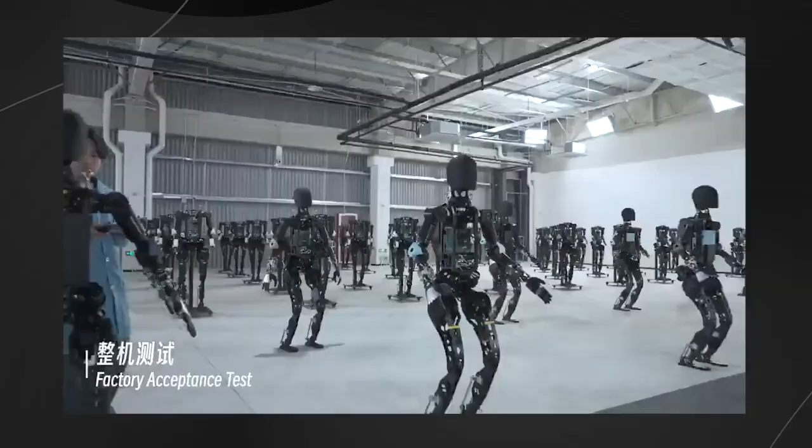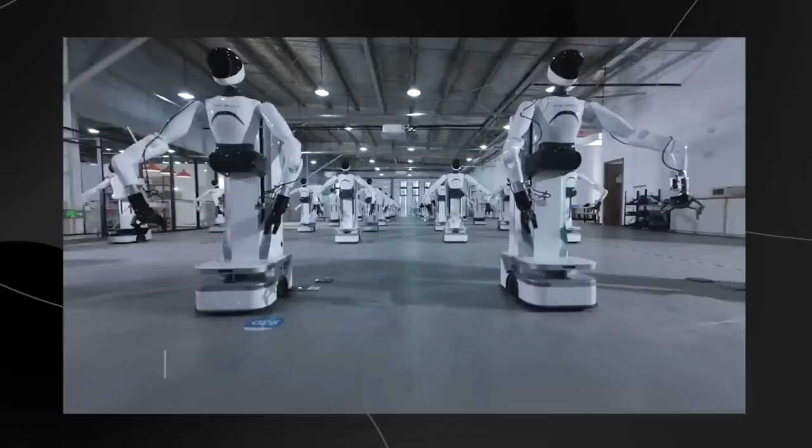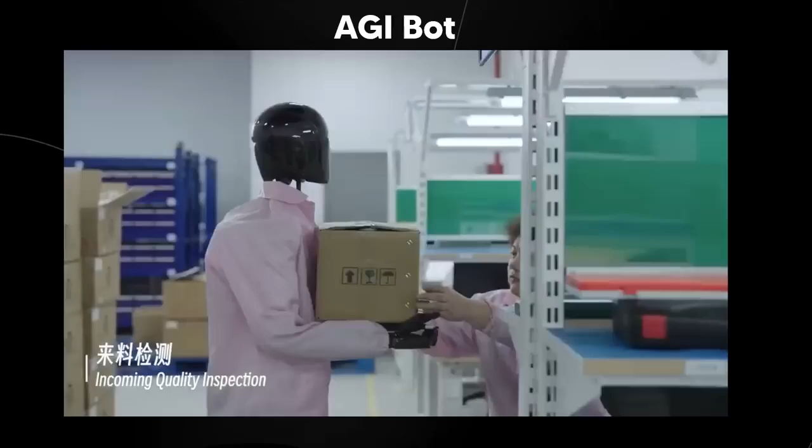China aims to mass produce humanoid robots by 2025. In this recent video from AGI Bot, a Shanghai-based robotics company specializing in the development and production of humanoid robots and delivery robots, we get to see firsthand how the world is actively changing behind the scenes. This company specializes in humanoid robots that will work in homes and factories around the world. Recently they've decided to hit the gas and ensure they're one of the leaders in this space, increasing production rates and scaling up.

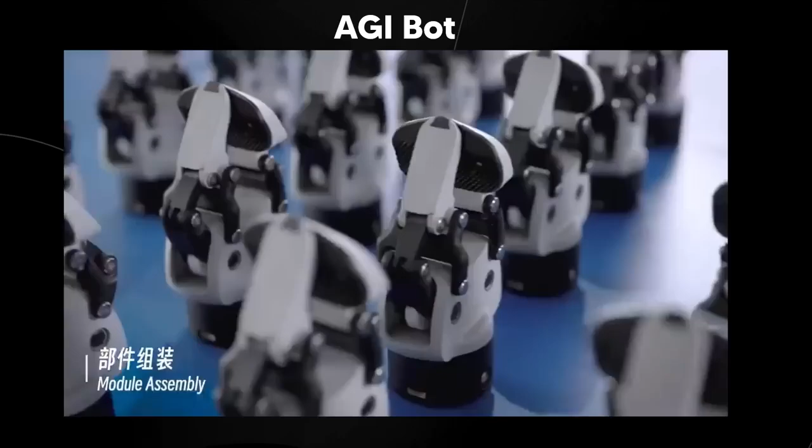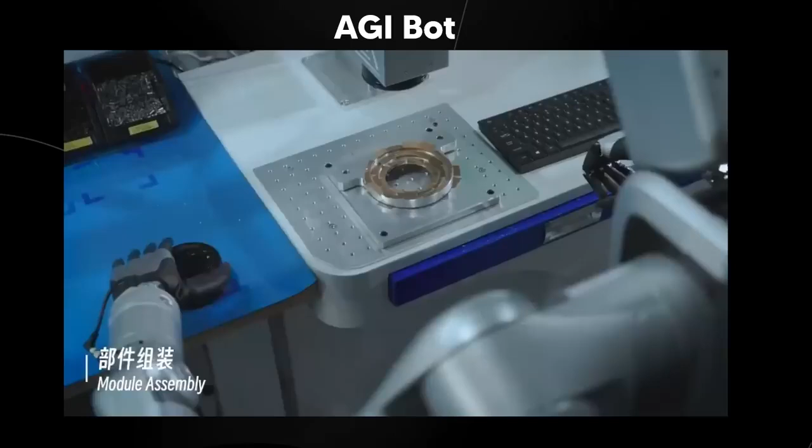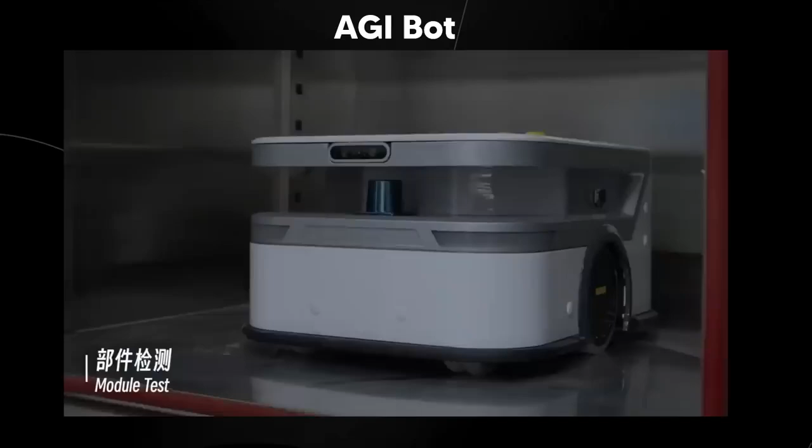In this demo, you can see them working on module assembly, ensuring the actuators are correct and all necessary components are working efficiently. They're going to produce so many robots that it will be incomprehensible the future we're going to be living in. Funnily enough, some robots in the factories are also assisting in this process, showing a symbiotic relationship that gets faster with every iteration cycle. After all, if you have more robots, you can get more done, and if you get more done, you can build more robots, and vice versa.

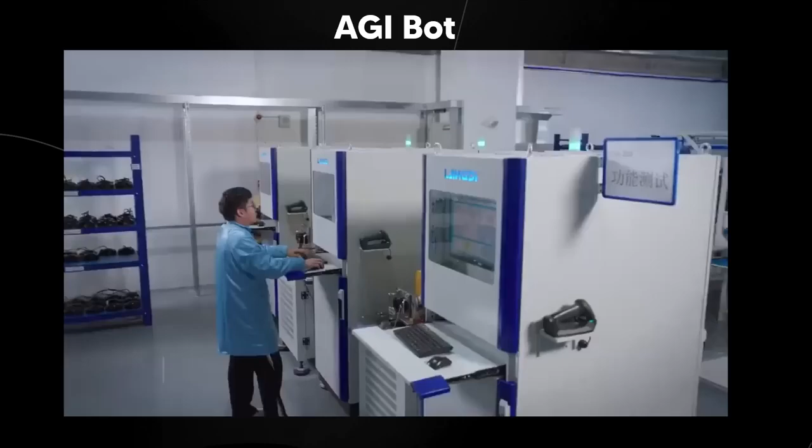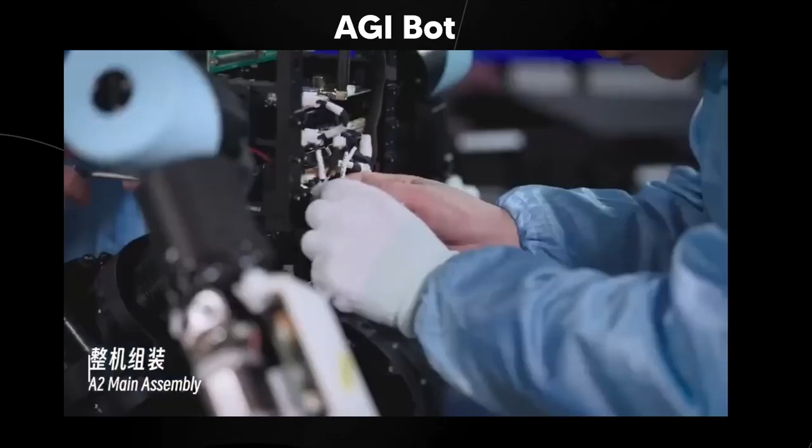They also have an extensive testing facility for these actuators, ensuring they can handle all necessary loads for many different environments. These robots are going to exist for quite some time, and they need to be tested in a variety of environments and stresses to ensure they're ready for the rugged, harsh terrain of the real world.

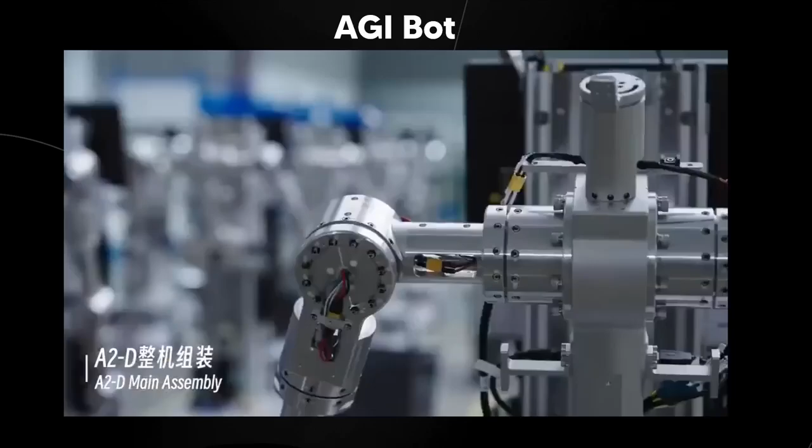Now, these robots aren't just humanoid robots. We can see here they have several different kinds. There's the A2D, and in the main assembly area we can see some have wheels at the bottom of their bases. This shows there are vast different applications for these kinds of robots, whether humanoids or wheeled ones, and different areas and applications that most people are going to be surprised by.

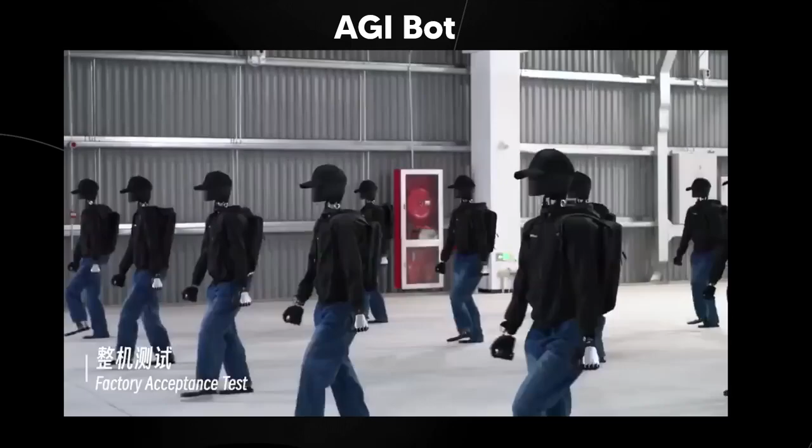At the last testing area, I'm not sure why they're dressed up, but it looks like a shot out of a Terminator movie. But no, this is a real demo from a real company that is really behind the scenes ramping up what is possible. We can also see at the Giga Data Factory just how many robots they have in production.

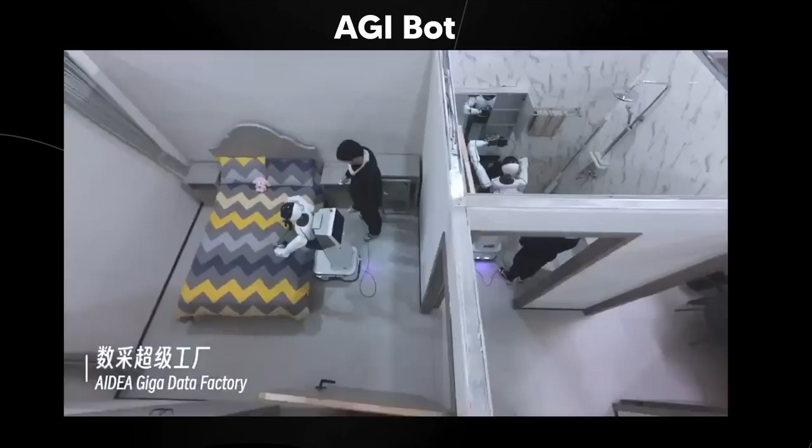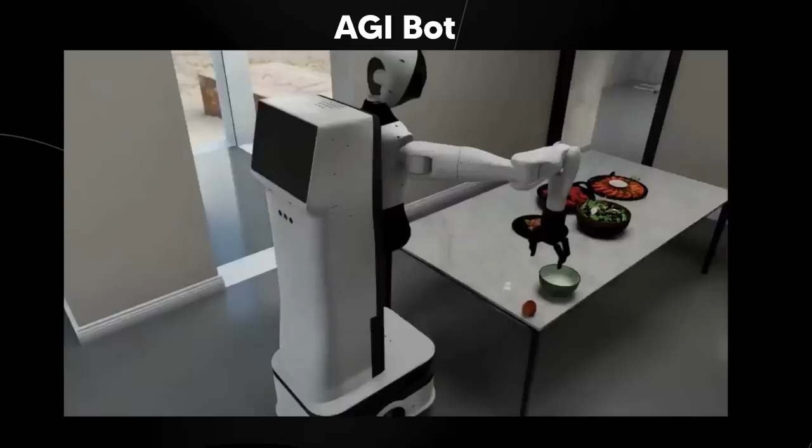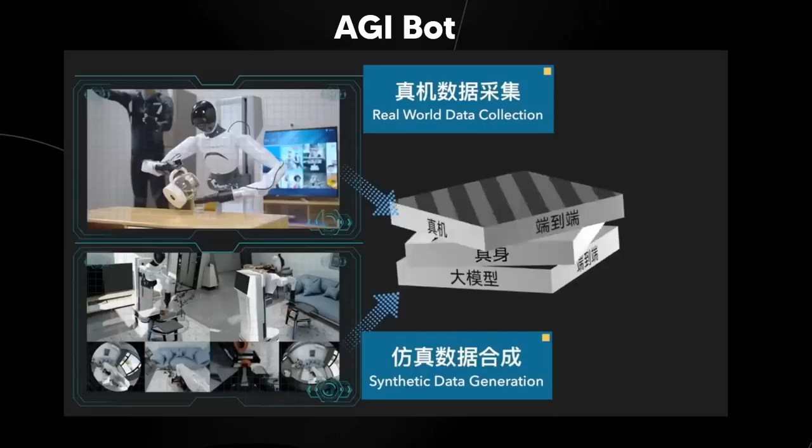One of the most incredible things they're doing with these robots is large scale data collection. They have small areas and environments where they're mimicking exactly where these robots will be deployed in your home. As you know, certain homes and environments differ in size and lighting, and all those individual factors have to be collected through vast amounts of data collection. This is how they're doing it: real world data collection and synthetic data generation.

With those two forces, they're able to generalize with these robots, have high precision, and with efficient fine-tuning, have a really effective stack that allows them to scale these robots to be the most effective at whatever task they do. Their AIDEA platform is going to be the one that allows them to scale this past the million mark. So it's going to be really interesting to see how these robots perform out there in the real world.

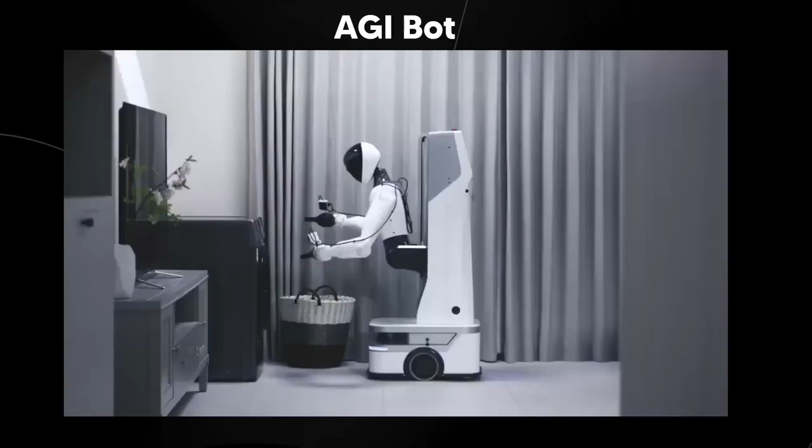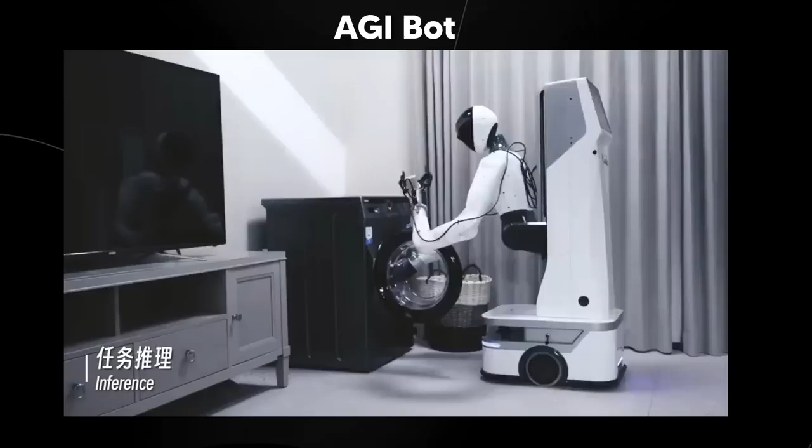But so far, based on what I'm seeing, a lot of the tasks these robots perform seem effortless and smooth. This comes as no surprise, as 2025 is the deadline for China's robotic efforts as they try to leap forward. I wouldn't be surprised if these robots, when commercialized, become quite as usual and normal as simply having a phone in your house.

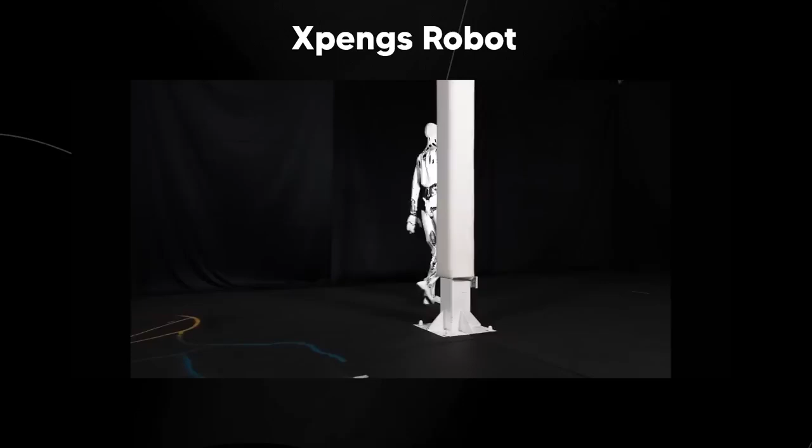This company isn't the only one doing this. We know other companies around China are also working on humanoid robots. The demo you're seeing here is XPeng's robot, a subsidiary of the Chinese electric vehicle company XPeng, focusing on developing intelligent bionics. This company was founded in 2016 and is headquartered in Shenzhen, China.

The craziest thing about this demo was when I showed it to my audience, they were really surprised this was even real. Many claimed it was CGI, but after seeing several demos of this robot in a variety of videos, it just goes to show how far we are in terms of the timeline to where these robots are performing things humans can't even fathom is actually real.

For those thinking this is just a short demo of it walking around in a pristine environment, the company showed us exactly how this robot will be applied to various industries. One key demo was this robot actually working inside a factory, doing several different tasks, and it seemed very human-like in its ability to grab certain objects, analyze objects, and efficiently work with the team.

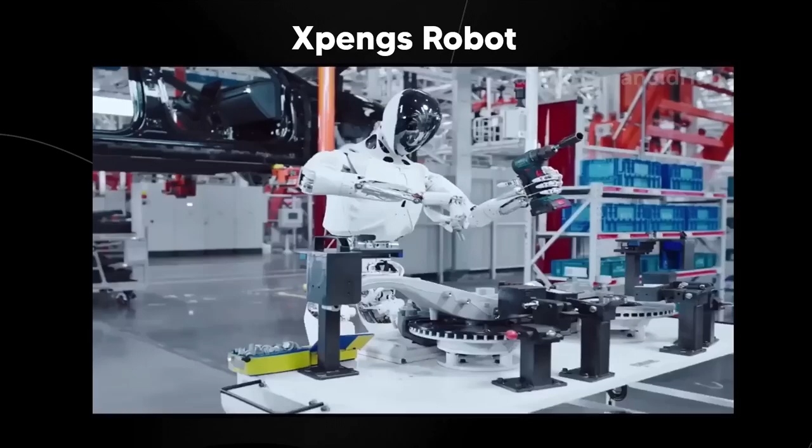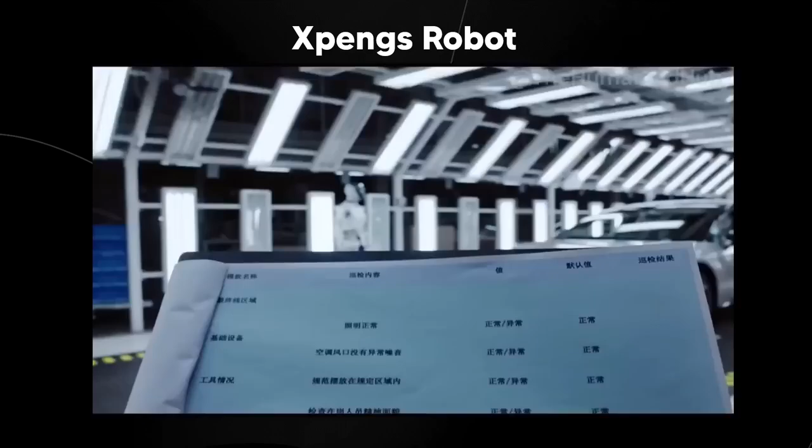This is surprising a lot of people, because right now we walk around and don't see humanoid robots walking amongst us. But behind the scenes in these factories in China, there is a quiet revolution brewing. Humanoid robots are going to be the next big thing in terms of market efficiency for those trying to scale any kind of physical labor-intensive company. We're seeing firsthand that these companies are really advancing in terms of pace and development.

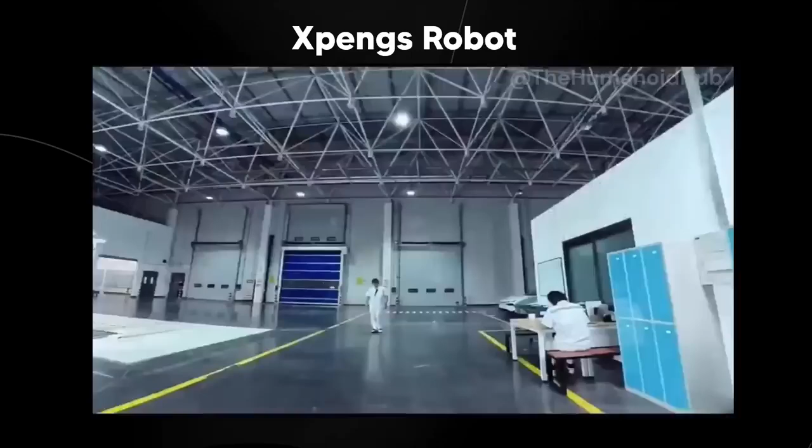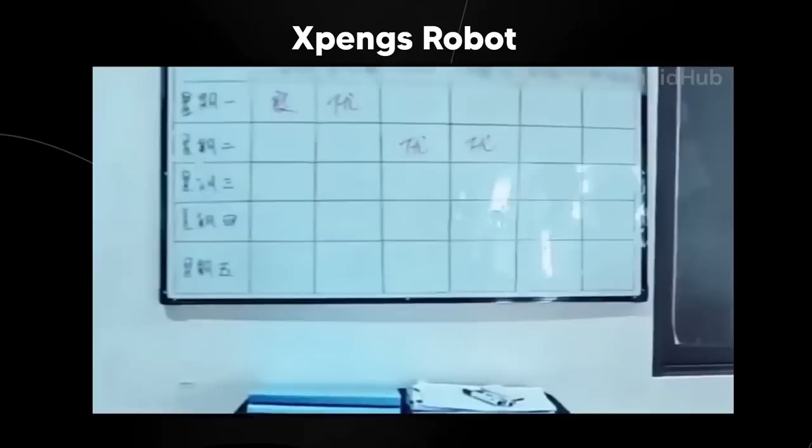Car manufacturers are one of the biggest users of these humanoid robots. I wouldn't be surprised if by the year 2030 we see fully automated car factories run by a team of humanoid robots, with maybe one or two orchestrators operating and automating them for efficiency. Overall, you can see the vision system performing really well, getting the robot to perform certain tasks.

I think this is one of those moments where you have to see, okay, we are now entering that futuristic timeline where humanoid robots are going to be a part of the future and a key part of the economy in terms of keeping up that economic growth.

This company has actually raised over 7 billion yuan in funding and gained the recent backing of industry giants like BYD and Huawei. This support coming from some of the biggest names in the industry is a clear sign that the world is starting to take humanoid robots seriously.

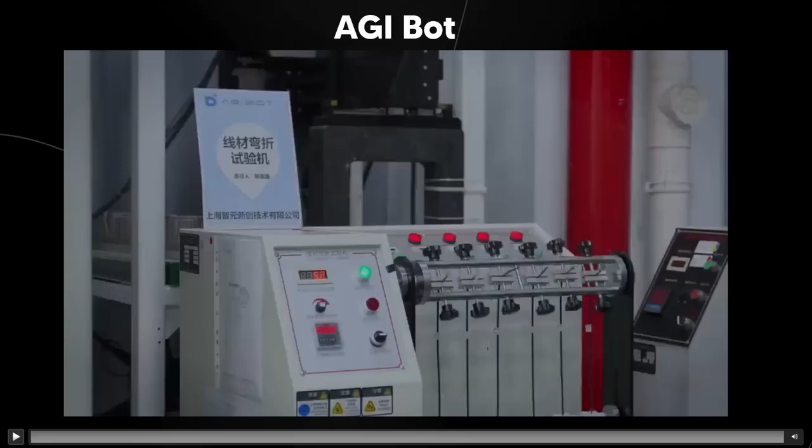There are still hurdles ahead, and some people believe there are still scientific challenges we will face before they can truly reach their full commercial potential. But with the progress they've already made, it seems this is something that's looking very exciting for the future of humanoid robotics.

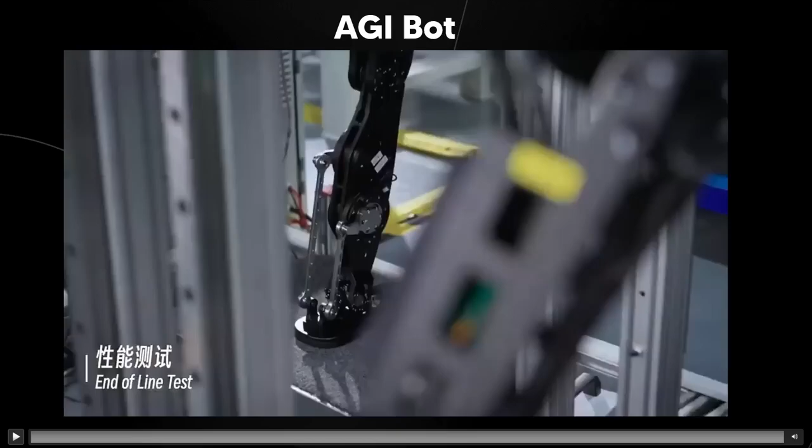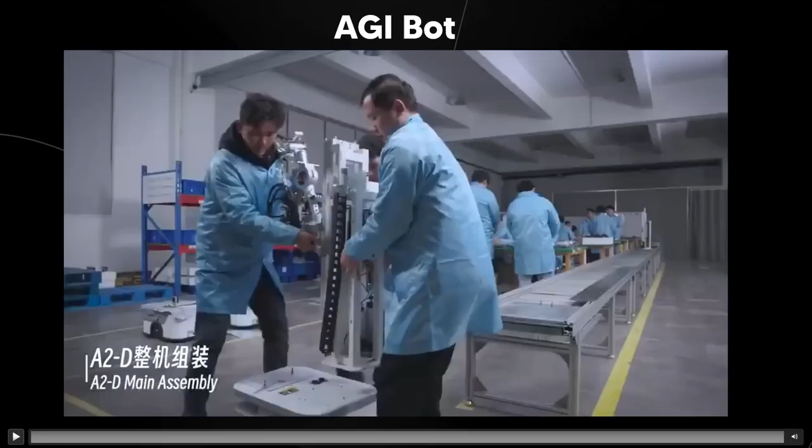I wouldn't be surprised if other companies, once they figure out all the kinks and small details, start to mass produce these robots as well. This is something I do have to pay attention to, as when it comes to applying AI to the embodiment aspect, this is something we're really going to be looking at firsthand. We've all seen the Figure demo and of course the 1X Neo robots, but I wonder how quickly China is going to scale their robotics efforts too.

With robot armies slowly coming to fruition and the robot workforce probably increasing in size year over year, what do you guys think of this future?